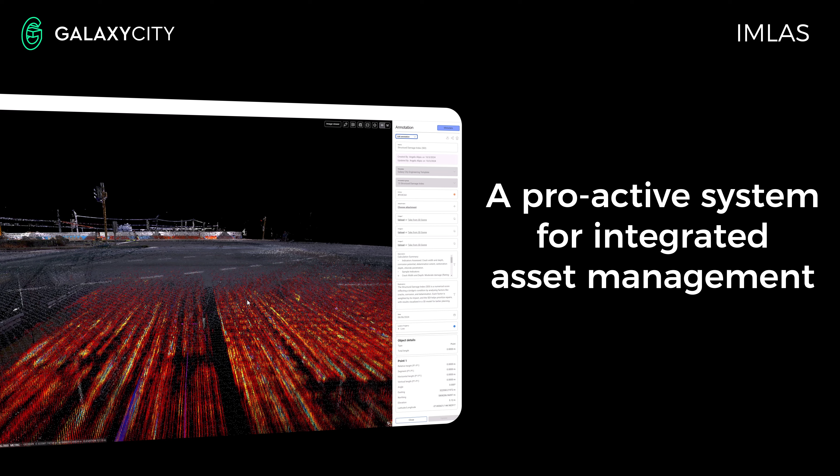In collaboration with international partners, we've developed a solution to address these issues: the Integrated Multi-Layered Analysis System, also known as IMLAS. IMLAS future-proofs your assets by helping you assess their condition, identify weak points, and establish a proactive repair timeline before failure occurs. It digitizes your asset data above ground, on ground, in concrete and underground, enabling virtual walkthroughs and seamless communication between all stakeholders. The system also works alongside existing systems, captures historical data for detailed reporting and ongoing asset management.

We are now ready to engage with our first large-scale infrastructure clients seeking to transform their asset lifecycle management. If you manage infrastructure such as bridges, dams, tunnels, or mines and are ready for this evolution, reach out and start your journey with us.

My colleague Angelo will now walk you through the system and show how it has already benefited our clients. During this walkthrough, you will also meet some of our partners who have helped bring this system to life.

My name is Yossi Kahlon, co-founder and CEO at Scan. We are focused on developing next-generation web-based spatial data management and visualization software. Our vision is to democratize spatial data, ensuring its availability to more people in a user-friendly manner. Additionally, we aim to empower stakeholders, including engineers, surveyors, and asset managers, to leverage spatial data across various functions such as asset inspection, asset integrity, and asset management.

In partnership with Galaxy City, a company devoted to innovation in the engineering market, we are tackling the complexities of spatial data and big data. By utilizing spatial data, we are overcoming engineering challenges and providing end customers with easy access to data and insightful information, helping them make more informed decisions.

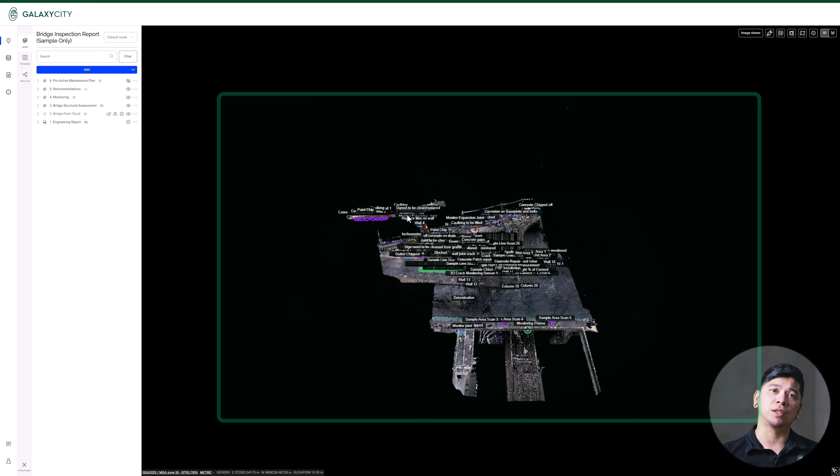Here we are looking at a sample bridge engineering report with some real-world results we pulled from our other projects. As you can see, the left panel displays all the annotations, organized in chronological order. On the right is the point cloud for easy visualization, and on top of that are the tools necessary to navigate your digital asset. Now let's take you through some examples of integrations that you won't normally see on a traditional method, making it more convenient for high-level asset management.

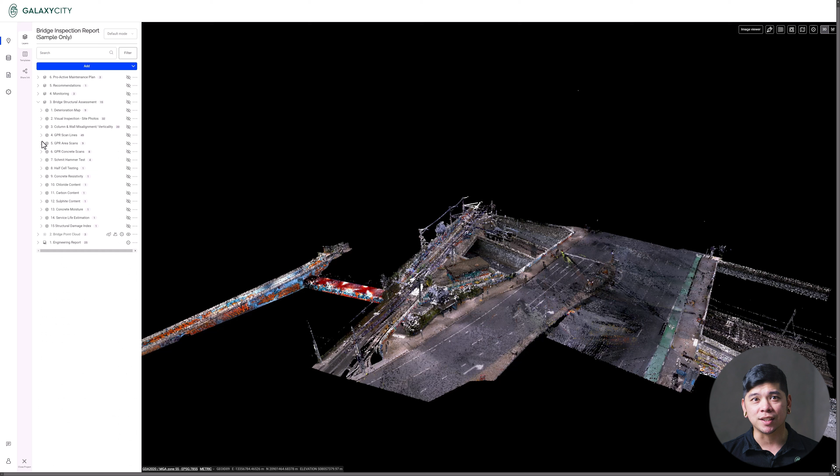Usually, the traditional method of submitting an engineering report is through extensive information in a PDF file—a PDF file so long that it'll take you half your day just to download it. IMLAS allows you to annotate and place the annotation at its actual location, allowing you to visualize it in its full context. Here's an example of an annotation that one of the engineers has spotted on site.

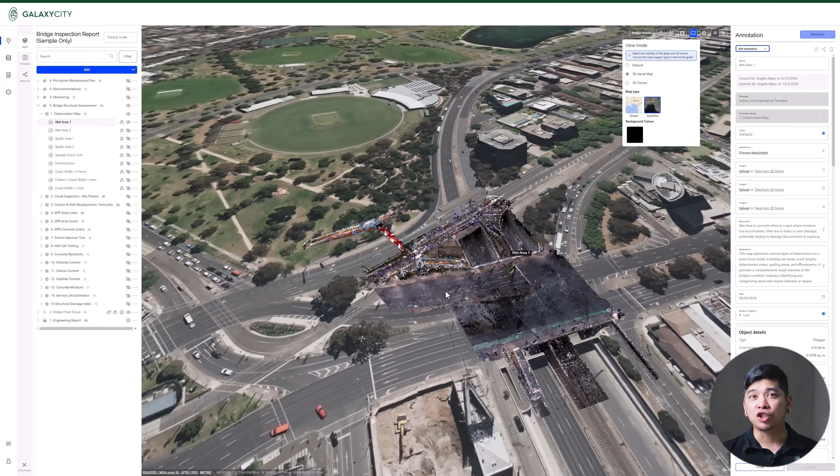In just a few clicks, you can see the exact location and the details of the wet area, as an example. One of the advantages of this data is that it is geo-referenced, meaning each point corresponds to the real-world coordinate. This enables integration of geospatial datasets, enhancing analysis by combining multiple layers of information that share the same spatial reference. Some of the common challenges in the industry that we face today involve managing data across multiple platforms.

This often leads to increased cost and maintenance, complications with version control and updates, difficulties in data access and collaboration, issues with data governance, and the problem of data redundancy.

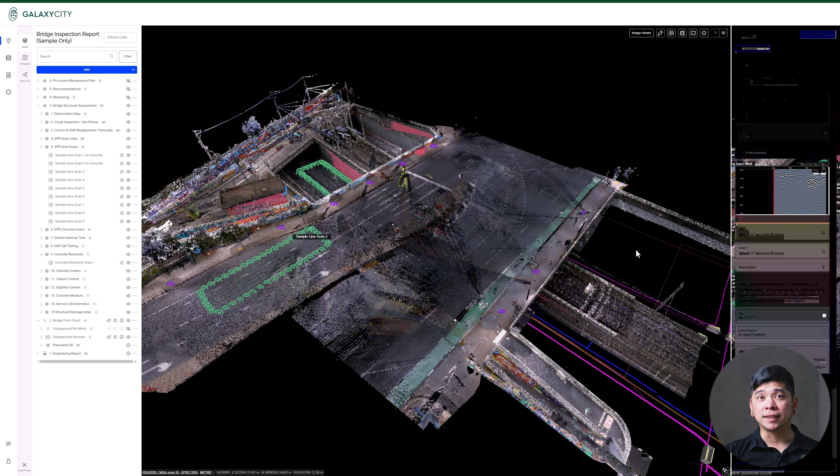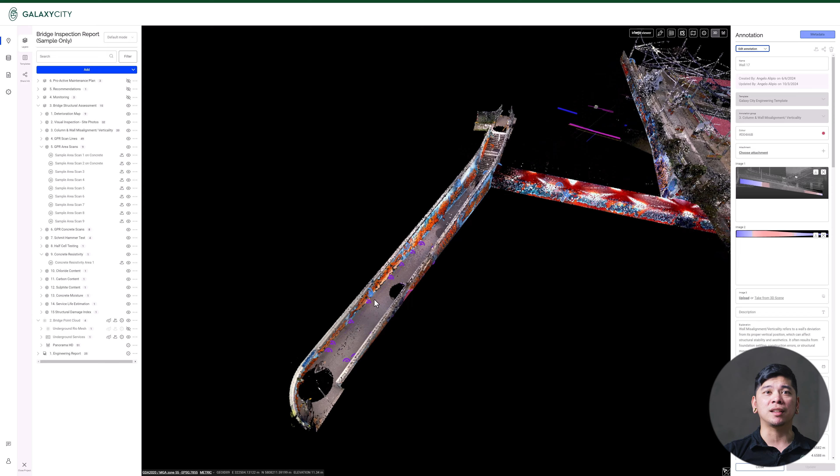IMLAS has a wide-ranging application across asset management, engineering, construction, and architecture by providing a holistic spatial view of the projects. In engineering, it helps validate designs, assess site conditions, and detect conflicts between different disciplines. For construction, IMLAS improves site planning, logistics, and real-time monitoring while minimizing delays and errors by detecting clashes with existing infrastructure. In architecture, it supports contextual design, 3D modeling, and compliance with zoning and environmental regulations. Overall, IMLAS enhances cross-departmental collaboration, improves communication, and ensures projects are completed more efficiently and accurately by integrating real-world spatial data into all phases of project development.

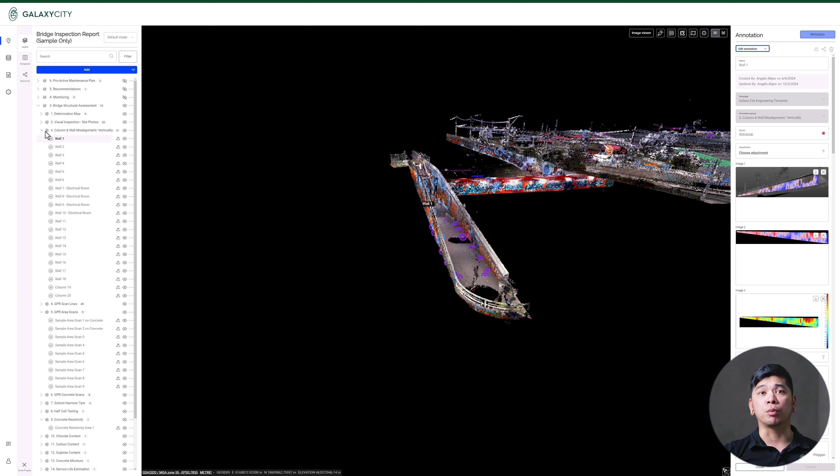These are tools that reveal what is below the surface, and why we are proud to work with Galaxy City. As the local rep for Screening Eagle Technologies, we put customers in the front row for new developments in subsurface scanning and condition assessment for the built world. For Galaxy City's IMLAS system, this is the ground penetrating radar scanners, which will locate and map buried cables, pipes, and services in the ground, and the network of steel reinforcement inside concrete. The full picture above and below ground secured, condition assessment tools like the Schmidt hammer for compressive strength of materials, and the Profometer for corrosion half-cell potential surveys. The risk of damaging steel can also be ascertained.

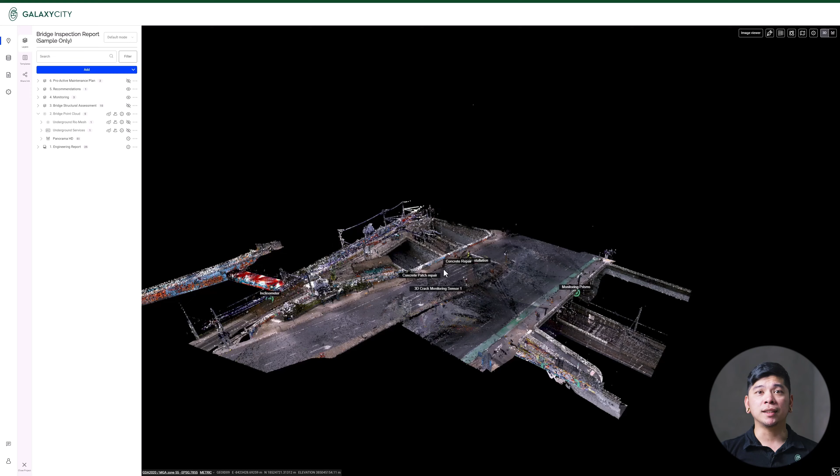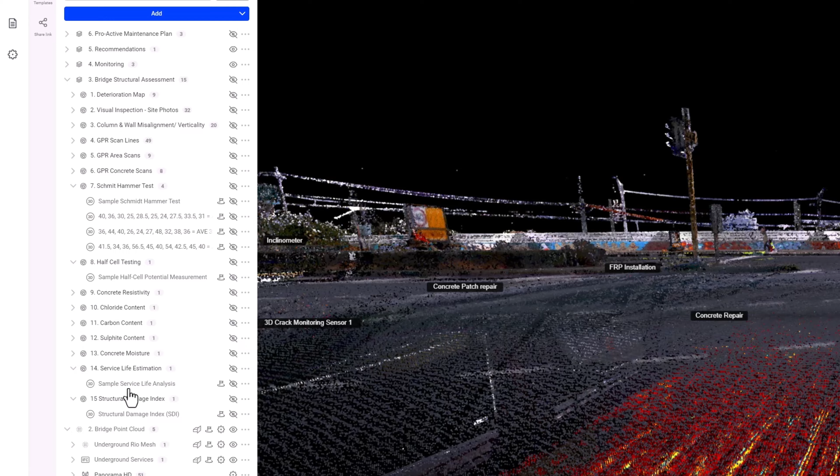With IMLAS, we take different data sets from different platforms, companies, and reporting methodologies into a single source website, making it easily accessible for everyone involved in the project. You can access this data anywhere in the world as long as you have an internet connection. For example, here are some of the methods and engineering tests we use to ensure comprehensive understanding of the asset's condition. With all of these results, we can easily determine the service life estimation of varying components, and in turn, the structural damage index of the asset.

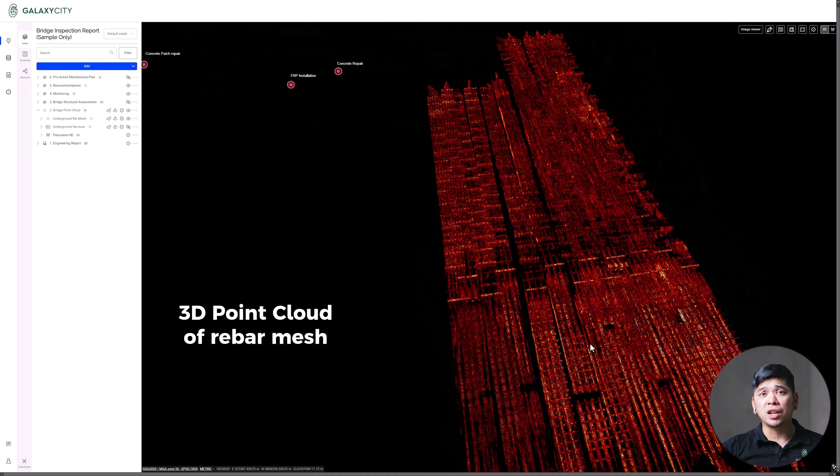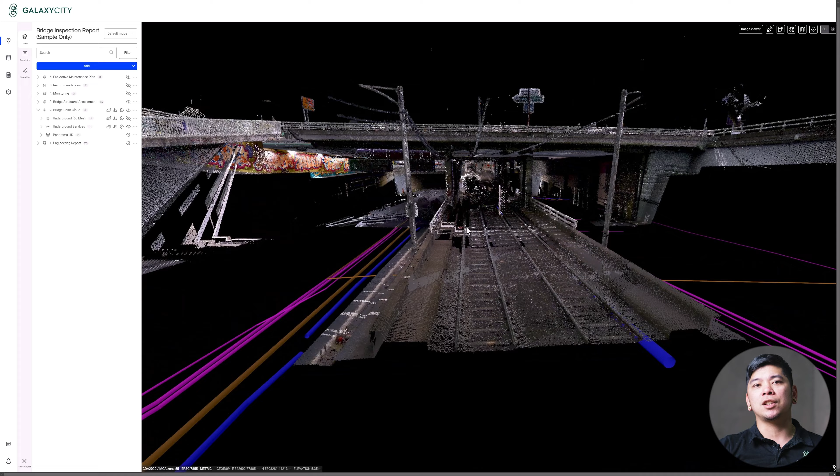At UPG, we specialise in addressing the challenges of capturing precise and reliable data through the latest advancements in technology. Our focus is on helping our clients gather accurate information both efficiently and effectively, saving them time, money, and providing the best solutions to their clients. Right now, we're proud to be working with Galaxy City, a company that's also dedicated to innovation in the construction space. Together, we're tackling the complexities of data capture and site management, ensuring that the most up-to-date equipment is being used. Laser scanning, remote measurement, and automated robotics are just a few of these solutions that Galaxy City have embraced with our support. By combining Trimble's technology, UPG's expertise with Galaxy City's vision, we're helping streamline workflows, reduce downtime, support informed project decision-making, and push the boundaries of what's possible in surveying and construction.

Collaborating with our partner, Ultimate Positioning Group, supplying us with the necessary surveying technologies from Trimble, we are able to create accurate data and analyze the asset in detail where the naked eye could not see.

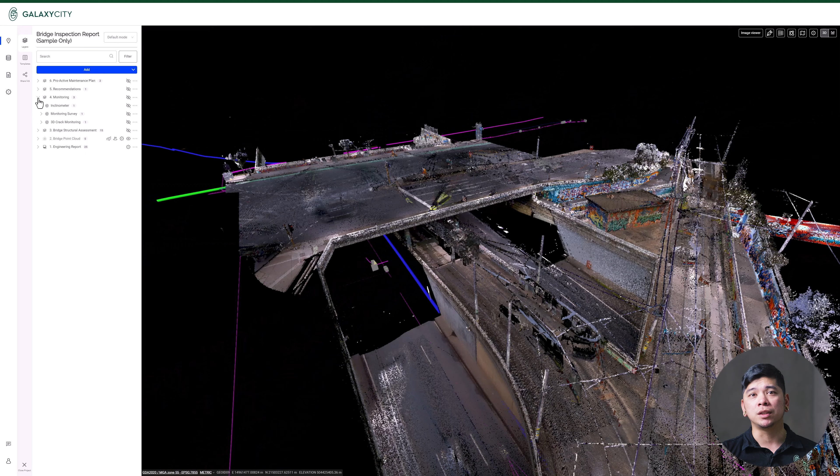Depending on the asset's requirements, various IoT or Internet of Things devices can be installed to collect data, ensuring engineers have sufficient information for accurate assessment and investigations. Some of the IoT devices we currently use include the 3D and 6D crack monitoring sensors by Swissco, inclinometers, temperature gauges, vibration sensors, and sometimes traditional monitoring surveys.

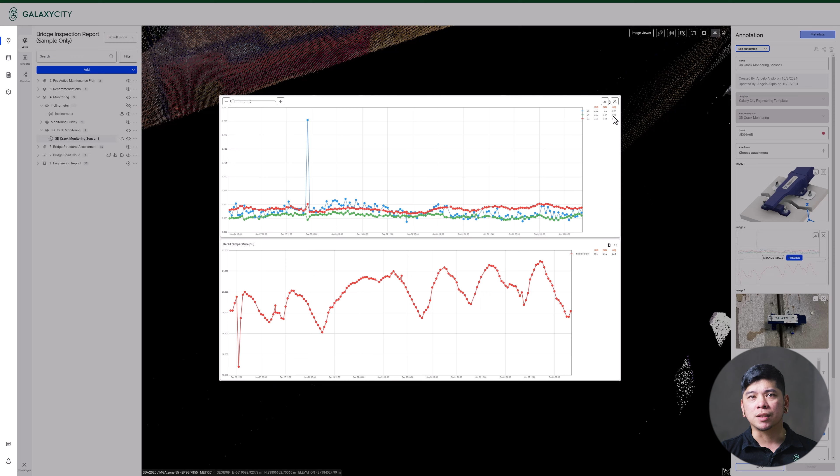A key advantage of this platform is its ability to consolidate all the data into a single hub, allowing seamless integration of the sensor data into the scanned platform.

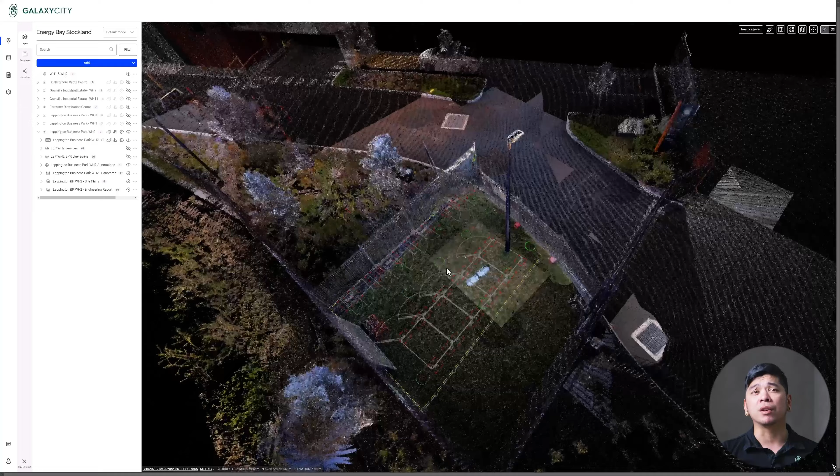A real-world example of how Holistic View can change the trajectory of the project is a foundation design our engineers created for a battery energy storage system, or BESS. The original design was completed and ready for submission. However, before proceeding, we superimposed the design onto the as-built point cloud and discovered that one of the bored piers was directly over the communication line.

Without the IMLAS, this oversight would have caused significant delays, costing tens of thousands of dollars. But fortunately, we could easily import and overlay the engineering design, and the issue was identified and flagged, leading to a new design that suited the current site condition.

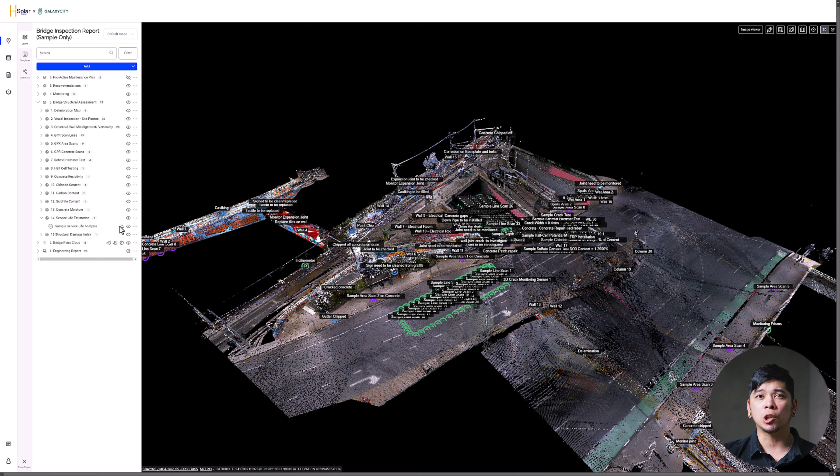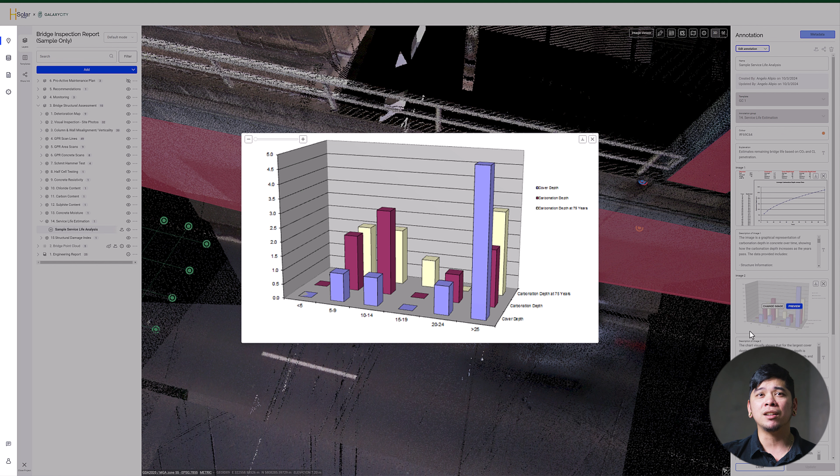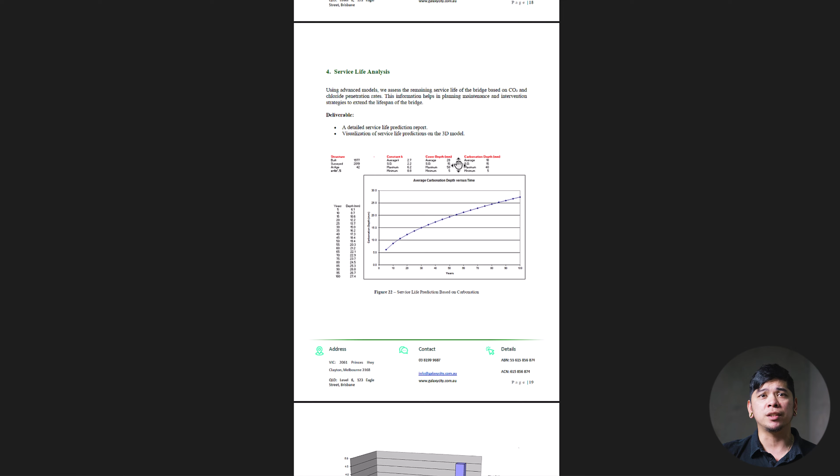In addition to service life estimation, we use a structural damage index, or SDI, to assess asset condition by consolidating inspection data into a single score that clearly reflects structural health. For example, in a recent project, we evaluated key factors like rebar corrosion potential, delamination, carbonation, chloride penetration, and active crack monitoring, resulting in an SDI score of 3.4 out of 5, indicating moderate to severe damage.

A key advantage of our approach is real-time tracking through IMLAS, which continuously monitors parameters such as crack width and integrates this data into SDI calculations. This gives clients full access to visualize the data, contour maps, and providing a transparent view of the structure's condition.

The SDI supports both immediate and long-term decision-making. Clients can set performance targets and plan interventions such as coatings or repairs to improve the SDI score. Without action, for example, the SDI could rise to 4.2 in 3 years, indicating further deterioration.

The integration of SDI with the digital data allows us to visualize deteriorated sections and develop proactive repair and maintenance plans. This approach enables timely action, better resource allocation, and maintenance scheduling, helping clients reduce reactive repairs, extend asset lifespan, and lower overall costs.

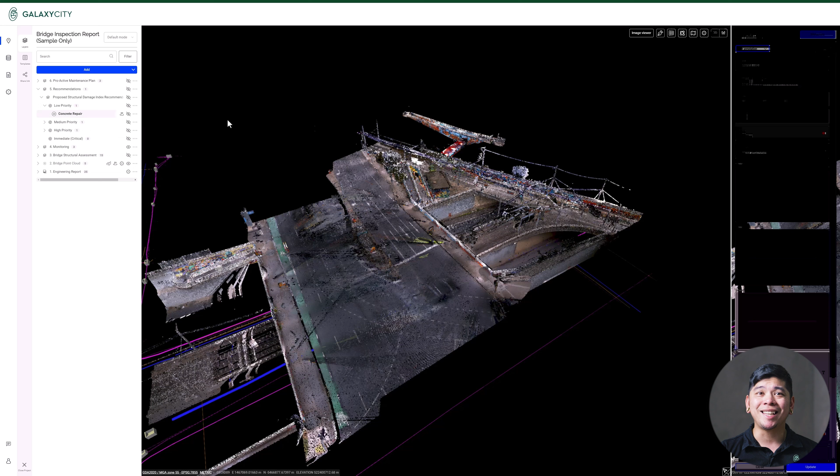The engineer's recommendations are then imported into the scanned platform, presenting a detailed summary of the results along with the specific actions required and the necessary materials. This allows teams to easily access and implement the guidance, ensuring all the tasks are completed efficiently with the correct resources.

Finally, our engineers developed a proactive maintenance plan for annual upkeep to ensure that the structural damage index is reduced over time. Thank you.

I hope you enjoyed this demonstration. What Angelo has shown is just a glimpse of the current capabilities of IMLAS. Our open source approach ensures that the system is flexible and adaptable to your organization's specific needs. IMLAS can scale in the areas that matter most to you, improving asset health, reducing unplanned downtime, enhancing oversight, and ultimately saving you both time and money.

So what are you waiting for? Let's revolutionize the way your assets are managed.